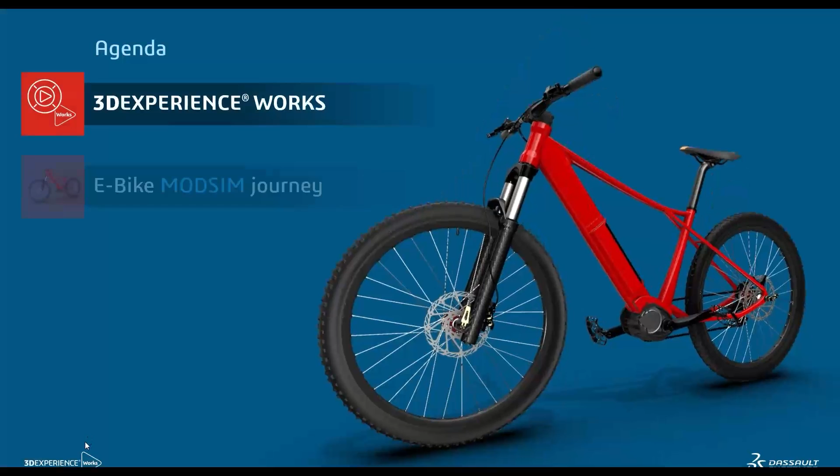So in today's presentation, we're going to start off by introducing to you what is 3D Experience Works portfolio, and then we'll dive straight into the MODSIM journey that involved design of this e-bike and improvement and enhancements associated with the same, and we'll wrap up with a few key takeaways.

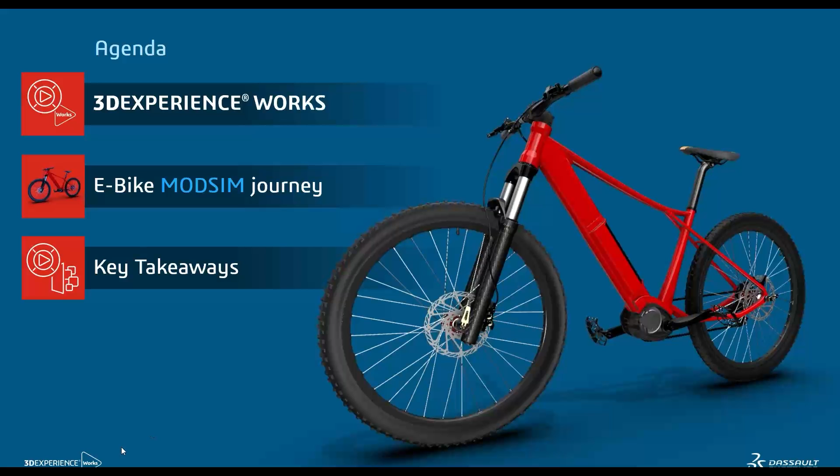3D Experience Works brings the power and breadth of 3D Experience platform to SolidWorks users. You are already quite entrenched with the awesome capabilities of SolidWorks in your design process. However, the 3D Experience platform integrates all brands and all products of Dassault Systèmes and brings their value with a native and fully integrated solution from design to simulation to manufacturing and governance and marketing and sales. However, in today's session, we're going to focus on synergy of SolidWorks and the Simulia-based applications on the 3D Experience platform.

Some of the key values that 3D Experience Works bring to the table is it leverages the fully integrated atmosphere of 3D Experience platform, where a SolidWorks CAD user can continue using the SolidWorks desktop, but take advantage of integrated simulation solutions on the 3D Experience platform. Yes, we understand that SolidWorks also offers a desktop simulation solution. However, the Simulia-based simulation roles on the 3D Experience platform bring some of the advanced capabilities, providing you a step up from SolidWorks desktop.

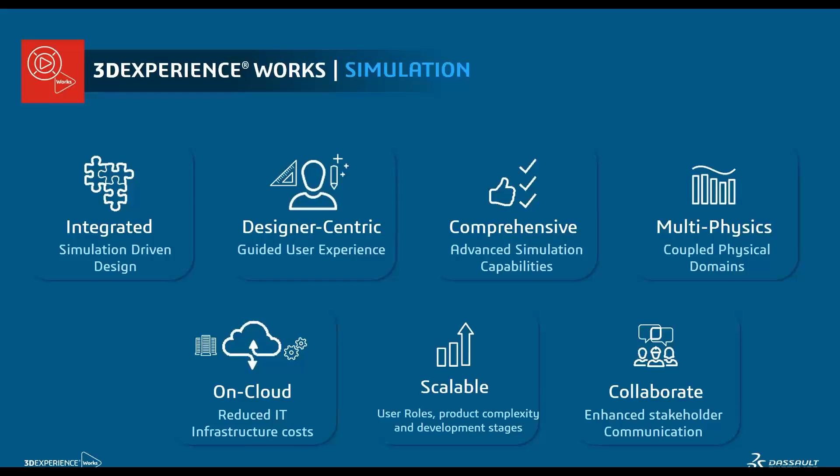Last but certainly not least, the most important value offered by simulation capabilities within the 3D Experience Works portfolio is the collaboration values, which allows the users to quite seamlessly collaborate across the product development chain and also across the supply chain. And hence, 3D Experience Works offers simulation-driven design in a collaborative cloud environment. What does this mean in a real product development atmosphere? That's why we have the e-bike example. And let me take you through this exciting MODSIM journey.

So in this case, we decided to build an electric bike as an example. Obviously, this is a fictitious case. However, we put ourselves in the shoes of our customers and went through the journey of designing a product. So some of the key drivers for us in terms of developing an e-bike were the growing popularity of electric bikes catering to a sharper rise in the demand for urban mobility, or more specifically green urban mobility, and a lot of tech-savvy consumers who are open to trying new technologies.

So to address this market need, we introduce to you the City Shark. This is the electric bike that consists of a battery pack, an electric motor, and a vehicle frame that is purpose built for commute with an electric powered motor.

Now let's switch gears and talk about the MODSIM approach. MODSIM, in very simple terms, leverages the synergy of modeling, in your case SolidWorks, and simulation, which in our case leverages the platform values. And it can be broadly classified into 5 categories.

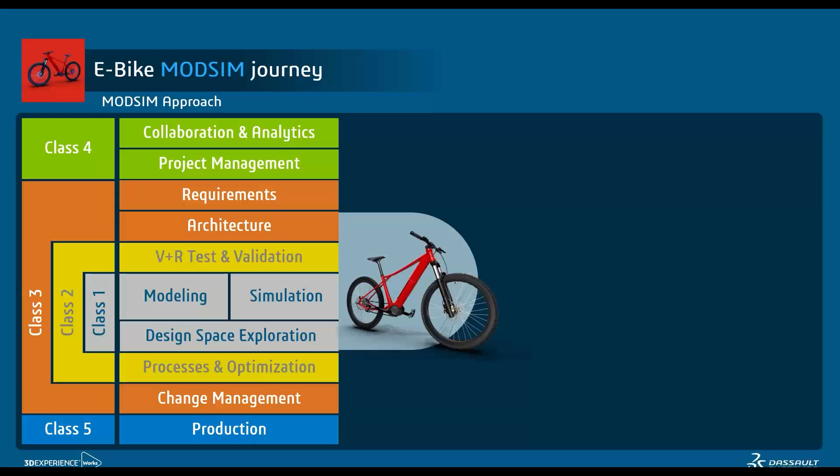The MODSIM journey starts from capturing requirements. So in this case, the key requirements include a lighter frame from a structural standpoint, a lighter motor pack from the electric motor supplier, extended battery range, which is a request from the battery supplier, and compliance readiness. These requirements can actually be captured on the 3D Experience platform and tied to the product tree so that you can trace specific dimensions and features of all these products all the way up to the requirements. You can ensure that the simulation results are allowing you to meet these requirements, and most importantly, change management of the same.

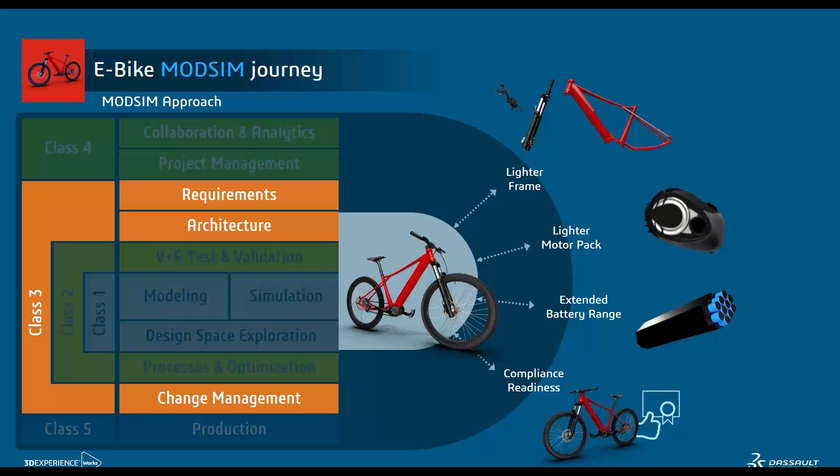Another class of MODSIM that we're going to talk about today is collaboration. In this case, we had multiple people across the globe, a manufacturer followed by a couple of suppliers, working from different parts of the globe. And in fact, this project was done during COVID, so there was no physical interaction between any of the stakeholders during this project. Leveraging the collaboration capability and also project planning and project management capability is quite key to class 4 of MODSIM.

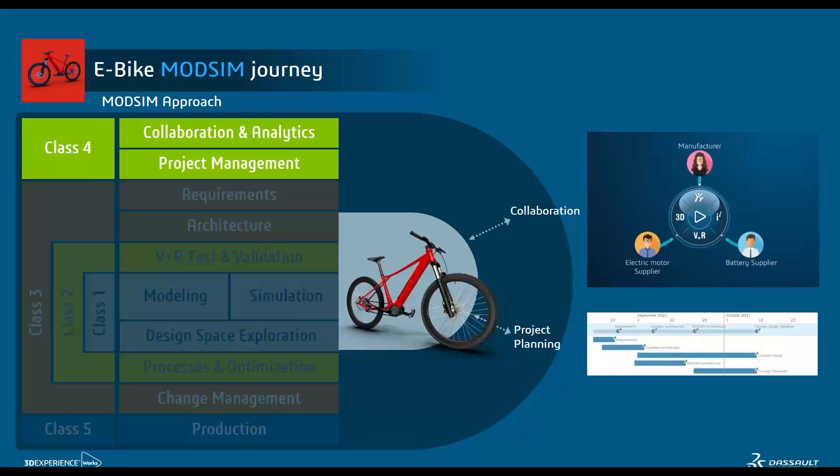Class 1 is the heart of MODSIM, and you may have already seen some of this with the SolidWorks CAD and simulation desktop portfolio. Here we leverage tight integration between SolidWorks for CAD or modeling and 3D Experience for simulation roles. Together we do a lot of design exploration to ensure that each subsystem meets the target requirements, from crash compliance to strength and durability to motor performance, battery thermal management, manufacturability from an injection molded plastic standpoint, and readiness for electromagnetics compliance.

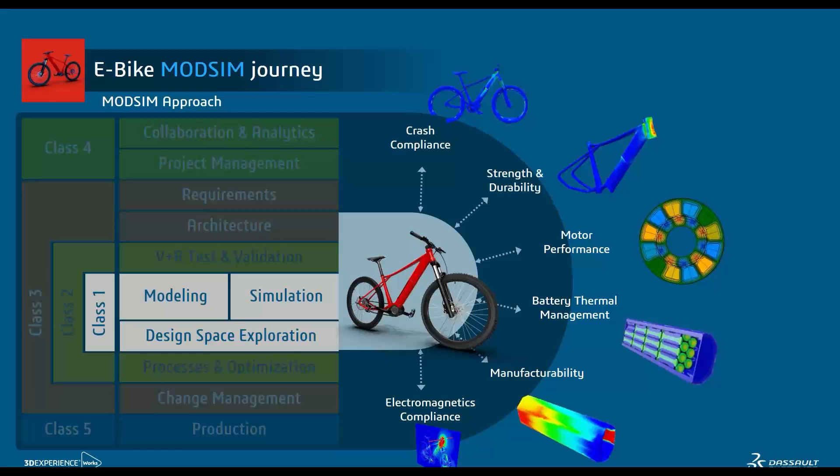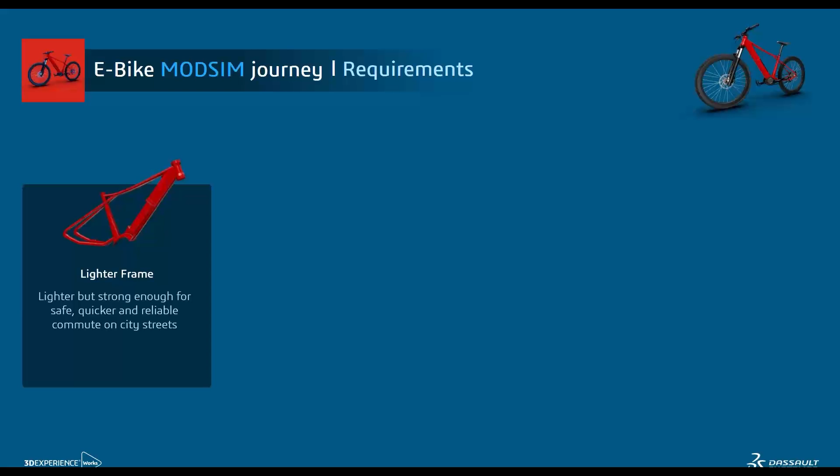So we've talked about what the MODSIM approach is, and now let's see the MODSIM journey in action. We're going to start all the way from requirements. In case of the e-bike, the key requirement from a structural standpoint is to have a lighter but stronger frame that is safe, quick, and extremely reliable for commuting on city streets.

From a battery standpoint, this is, we could almost say, the fuel or the energy house of the bike. The goal here is to deliver maximum power for the targeted range while ensuring safety from a thermal standpoint, both the safety of the battery and the safety of the rider during the urban commute.

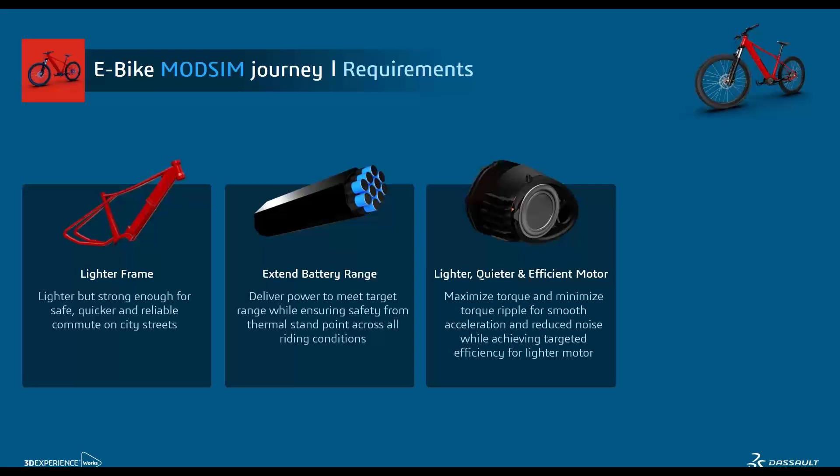The requirement from the electric motor supplier is to have a lighter, quieter, and more efficient motor. What does that mean? That means we need to maximize the torque while minimizing the torque ripple effects that have a direct impact on smoothness or harshness of acceleration, and reduce noise while achieving the targeted efficiency. And then compliance. In this case, leveraging simulation, we will try to gain confidence in whether the product in its integrated format is ready for compliance.

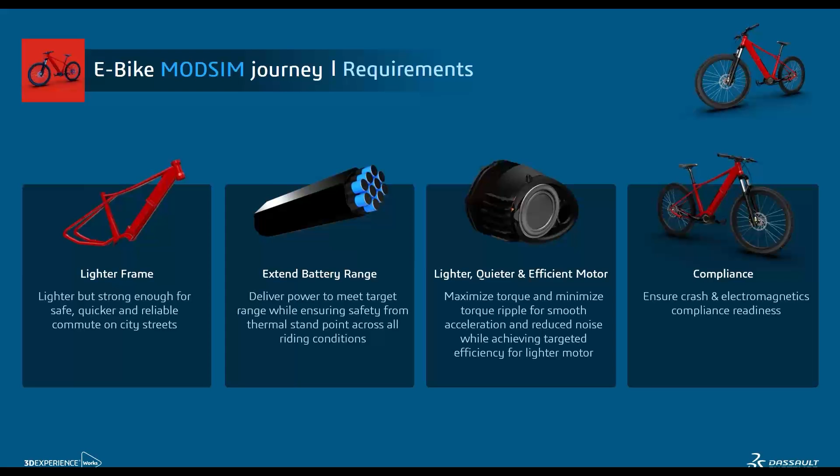So from a requirements standpoint, 3D Experience Works allows you to efficiently capture the requirements and manage them throughout the product innovation cycle. And all these requirements will actually be tied to the product tree.

Next is collaboration. We have the design work that's done on SolidWorks and the simulation work that's done on the 3D Experience platform, and they're very tightly integrated with each other, breaking the silos in a multidisciplinary environment. So here, we're not exporting or importing files. We are staying in the same model data while we're adding more and more simulation information throughout. While SolidWorks brings very powerful on-premise desktop capability, 3D Experience complements it with a cloud-based solution that makes your life easier for running expensive simulation types.

So in very simple terms, the integration between SolidWorks and simulation on the 3D Experience platform allows quite streamlined product development process, efficient MODSIM workflow, and powerful what-if scenarios. So let's look at it from the lens or from the eyes of a mechanical designer. The goal here is to explore design alternatives in order to meet engineering requirements.

So during the next few minutes, we will talk about how durability or life of the frame and the strength of the frame was ensured, how the injection molding simulations were performed to choose the design of the battery casing, how thermal simulations were performed to ensure the thermal safety of the rider as well as the battery, and last but not the least, electromagnetic simulation of the motor to ensure higher efficiency and lower torque ripple.

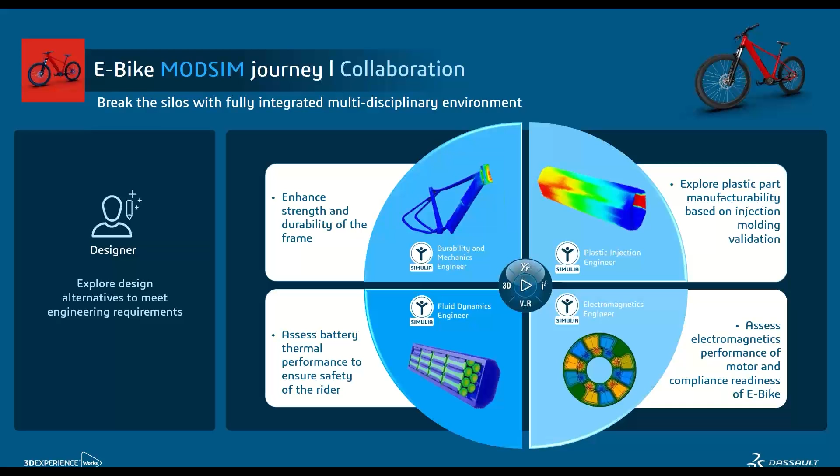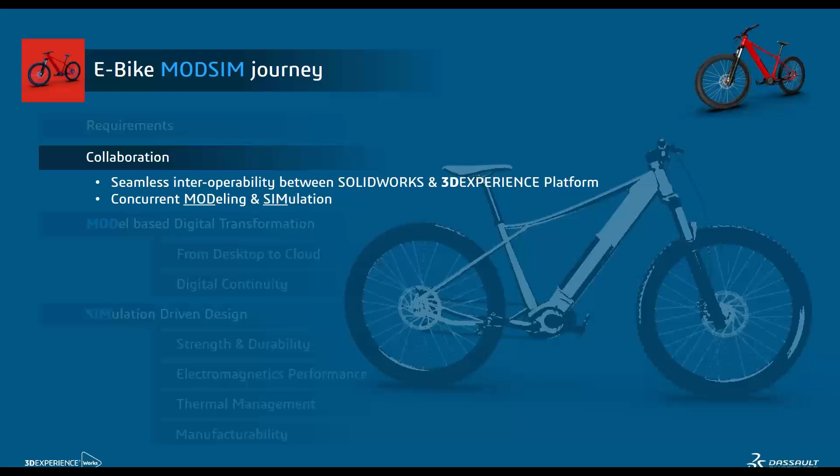So from a collaboration standpoint, 3D Experience Works with the MODSIM journey offers seamless interoperability and concurrent modeling and simulation. So let's go ahead and dive straight into it. We start our journey from the desktop and then go up to cloud. With 3D Experience platform, you can directly launch your SolidWorks environment with Design with SolidWorks app.

So here is the UI that walks you through the installation process of the SolidWorks, which you're already familiar with. Once SolidWorks is installed on the platform, you can request access to the collaborative designer role for the SolidWorks. And once you have access to this role, you're pretty much set with launching your 3D Experience UI directly from the cloud. And you see the compass that connects the powerful 3D Experience platform capability to your SolidWorks desktop.

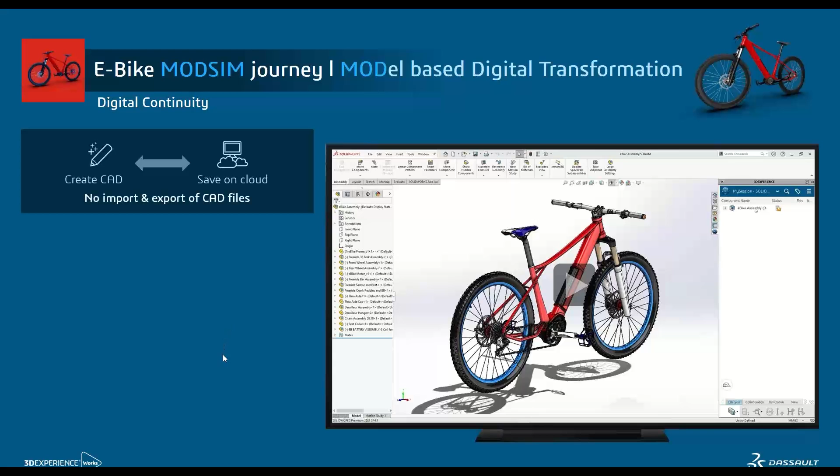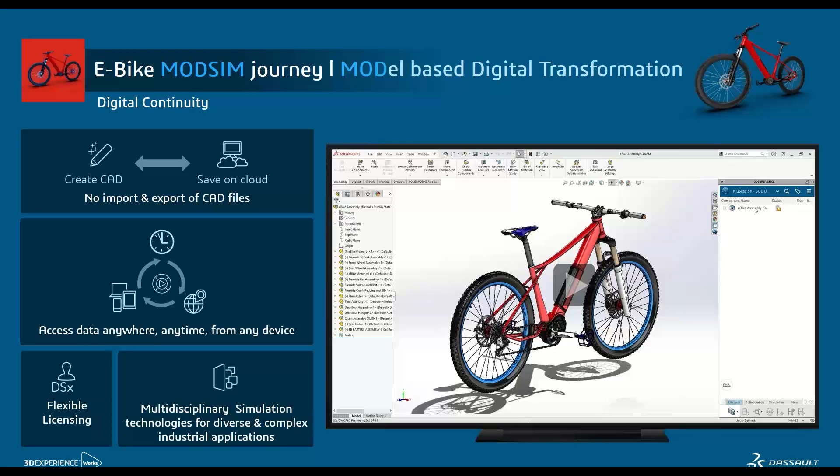So here we are going to ensure this digital continuity because the CAD is created only once, and that's within your SolidWorks environment. And then you save it on the platform with no need to import or export CAD files. And then you can come back to SolidWorks as many times, make as many design changes, and update your simulation model. Most importantly, we are going to leverage the multidisciplinary environment of 3D Experience platform from a simulation standpoint to assess the product performance.

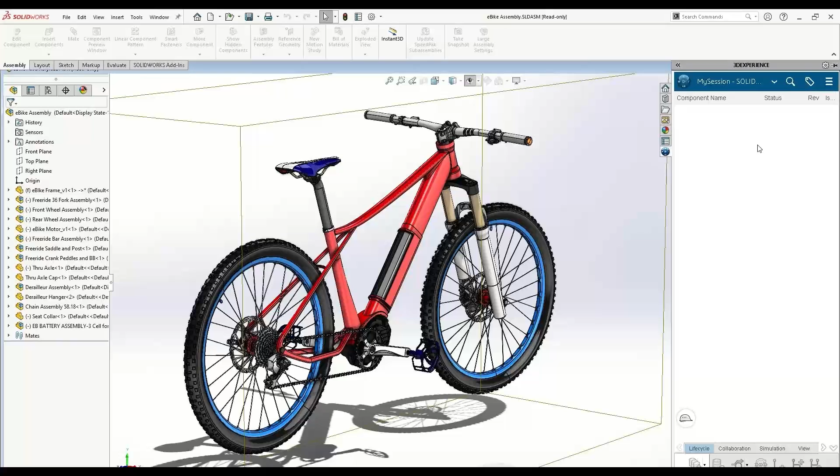So in here, we're going to launch our SolidWorks UI and load up the current version of the e-bike model. And now we want to make various changes from the structure of the frame to the battery casing design to the electric motor. As you can see on the right hand side, I have the compass, and that allows me to save this model originally created in SolidWorks on the platform and launch the structural simulation capability that's powered by Simulia Abaqus technology directly from the SolidWorks UI.

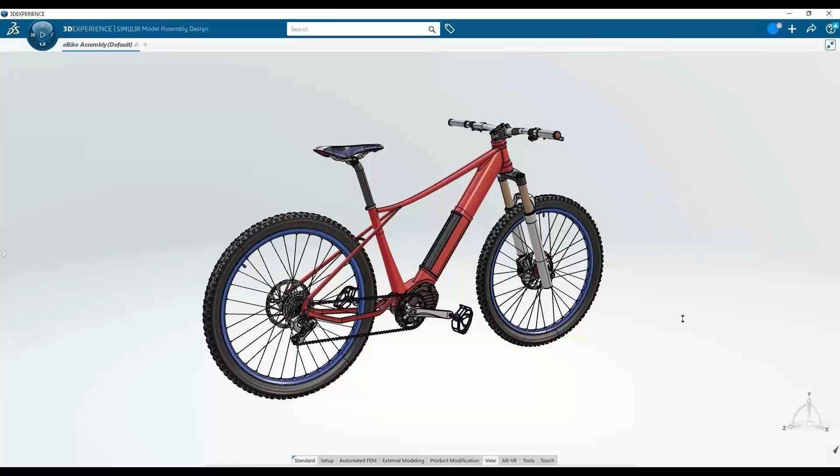So now we are in the 3D Experience platform user experience, and we're going to go through the structural simulation of this e-bike. With that said, what you saw is clear digital continuity that allows you easy and instant access to latest version of the software because it's cloud-based, so you get very quick updates. And the cloud installation is quite seamless. You can get started within an hour from the minute you have the license up and running.

So now we've built the foundations. We've captured the requirements. We have established the collaboration between the OEM and the suppliers and the key stakeholders. We've installed 3D Experience platform and connected the same to SolidWorks. We've even loaded our SolidWorks model on the 3D Experience platform. Now we're going to go through the simulation journey in terms of strength and durability, electromagnetics performance, thermal management, and manufacturability.

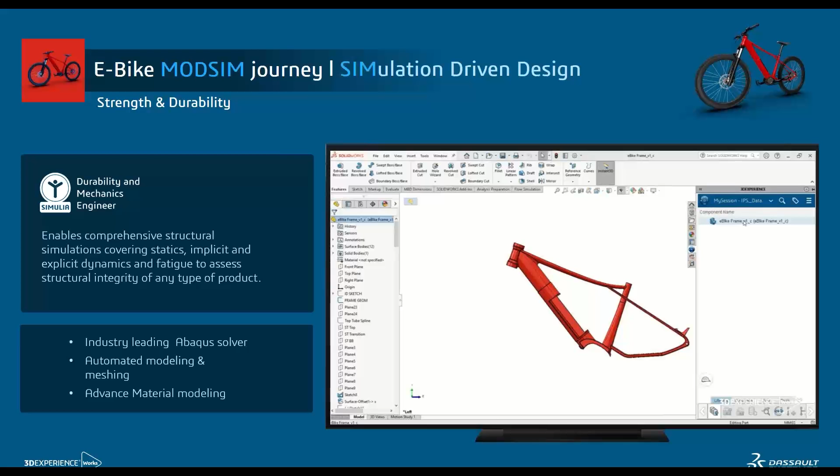For strength and durability, you can take advantage of durability and mechanics engineer role that brings industry-leading Abaqus solver for performing comprehensive structural simulations covering statics, implicit and explicit dynamics, fatigue analysis to assess the overall structural integrity of the product. It also comes with automated modeling and meshing capability that significantly reduces the turnaround time for product development and simulation. It also comes with advanced material modeling capabilities, which add a huge value when you're early in your product design exploration phase.

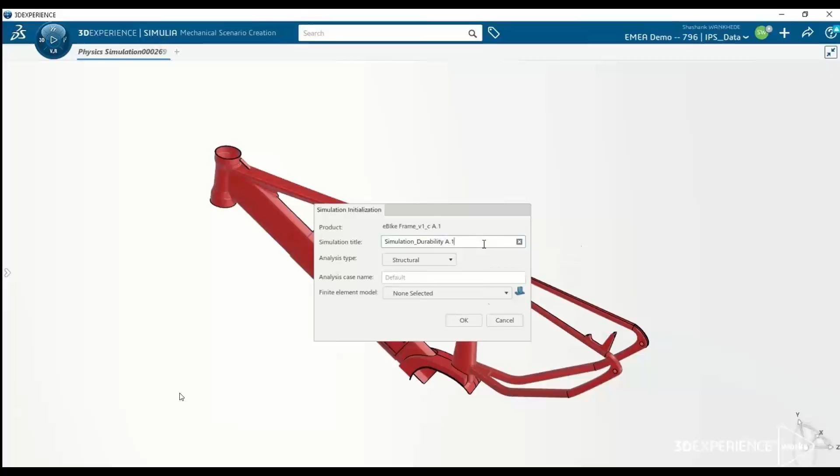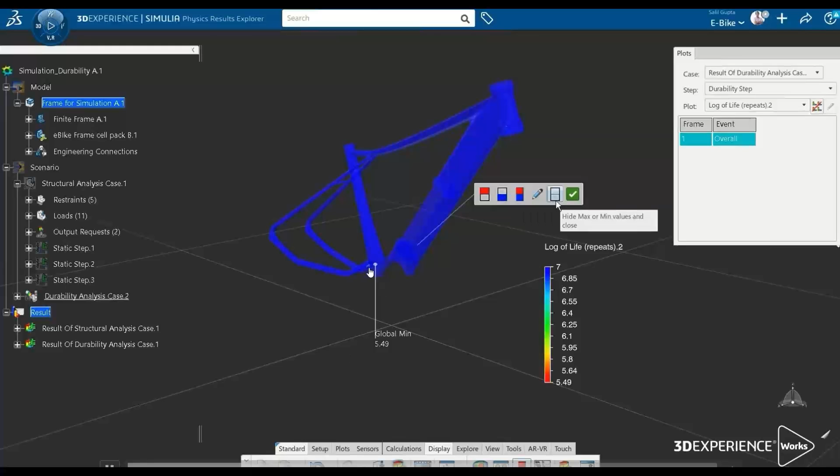With that said, we first start with the assessment of structural integrity of the frame in terms of, is the material light enough? Is the structure strong enough to sustain various load cases? So this simulation involves a linear static stress analysis followed by a durability analysis. The von Mises stresses indicate higher stresses near the neck of the frame, whereas the durability analysis indicates lower log of life or lower lifespan near the joint that's quite closer to where the electric motor is mounted, where the back elements come and connect with the central part of the frame.

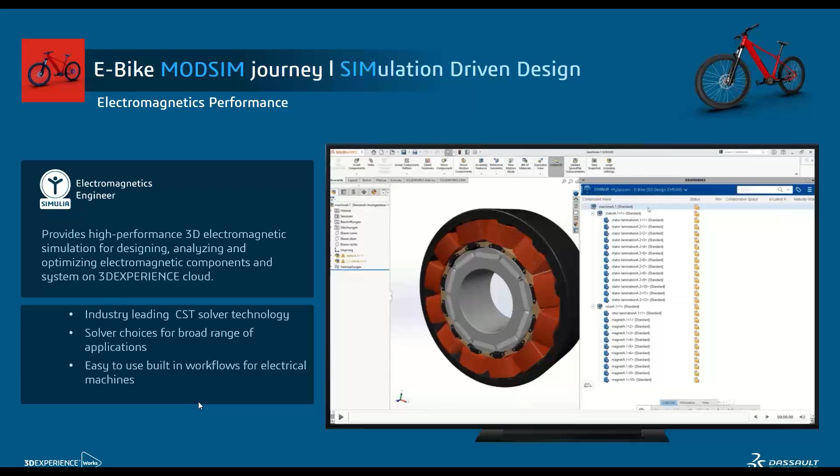Based on this information, we could redesign in SolidWorks, come back to the platform, and update the simulation data. What about electromagnetics performance? The electromagnetics engineer role offers industry-leading CST solver technology in the context of the 3D Experience platform, and offers broad solver choices for applications ranging from antennas to motors to PCBs in terms of assessing and optimizing the electromagnetic performance.

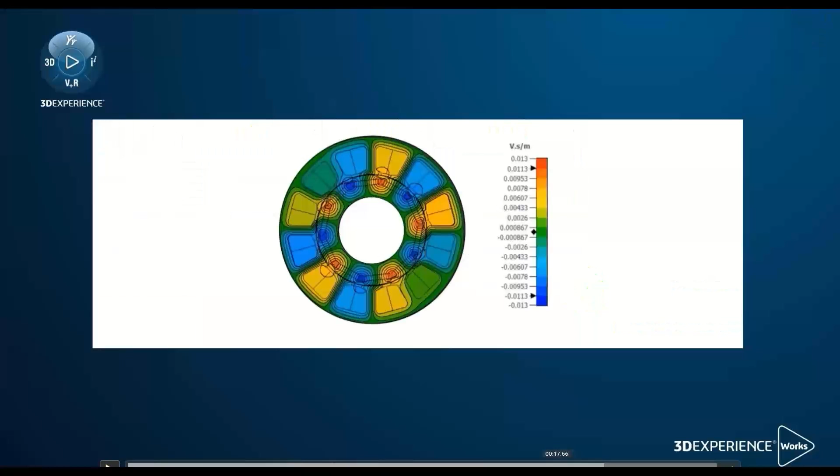Here is the permanent magnet electric motor that's used in the design, and our supplier is also using SolidWorks CAD, but is exploring various designs and ranking them based on maximum torque value. So several CST simulations were performed in order to ensure that there is highest torque, reasonable efficiency, and acceptable level of torque ripple. Torque ripple is a key performance indicator that ensures smoothness in acceleration for any electric motor.

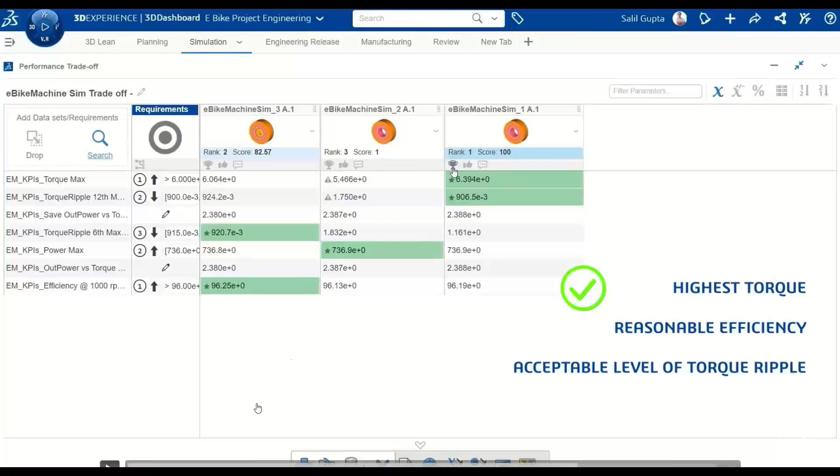So leveraging performance trade-off study, you can assess the electromagnetic performance between various designs of the electric motors within the 3D Experience platform. You can also ensure that the results are yielding higher yet smooth ramp up of acceleration while minimizing the noise experienced by the rider.

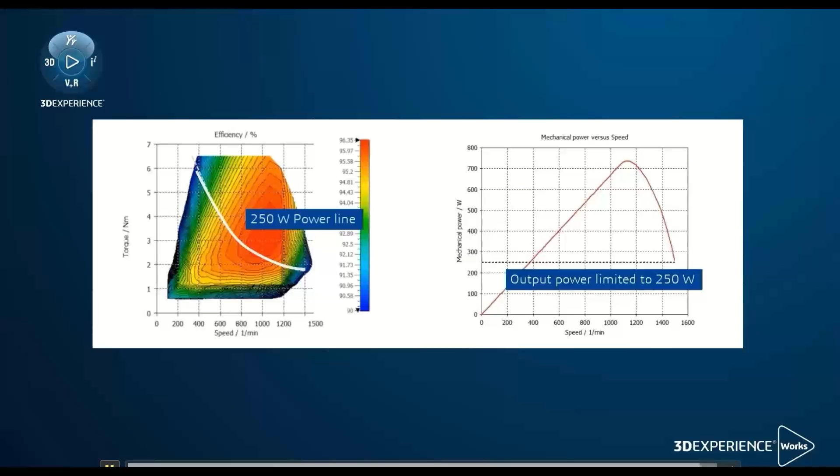Then we switch gears and talk about thermal management. In case of battery thermal management, we leverage the fluid dynamics engineer role, which enables designers and engineers to perform fluid flow and thermal simulations in order to explore and improve the product designs. The fluid dynamics engineer role brings a very guided user interface that is quite tailored for non-simulation experts and experts alike. It offers automated meshing with boundary layer modeling technology, comes with industry standard turbulence models and advanced wall modeling options. It has quite comprehensive fluid flow and thermal physics capability.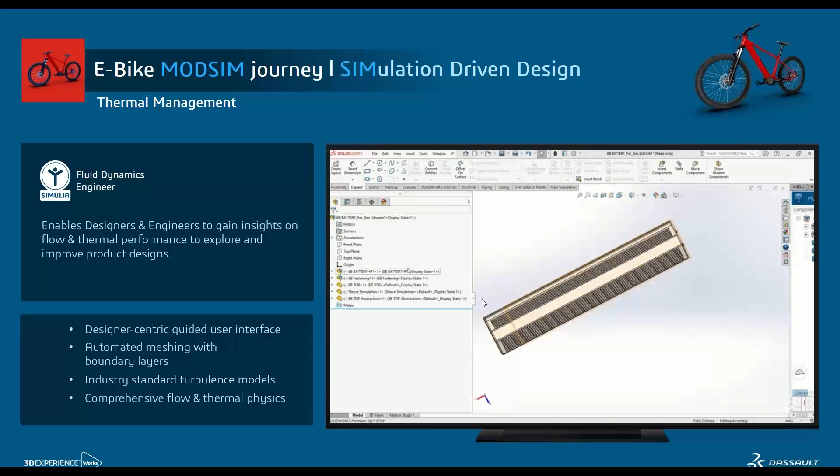So in this case, we are primarily interested in exploring whether a casing needs to be plain or whether adding long slots would help in meeting the thermal requirements. So again, we start with the SolidWorks environment. We save this model on the 3D Experience platform. In order to extend the range, we've gone up from 3 battery modules to 4 modules. What you're seeing on the right-hand side is the guided user interface offered by the Fluid Dynamics Engineer role that literally walks users through every step of the simulation setup process, providing real-time feedback and guiding them on the next steps.

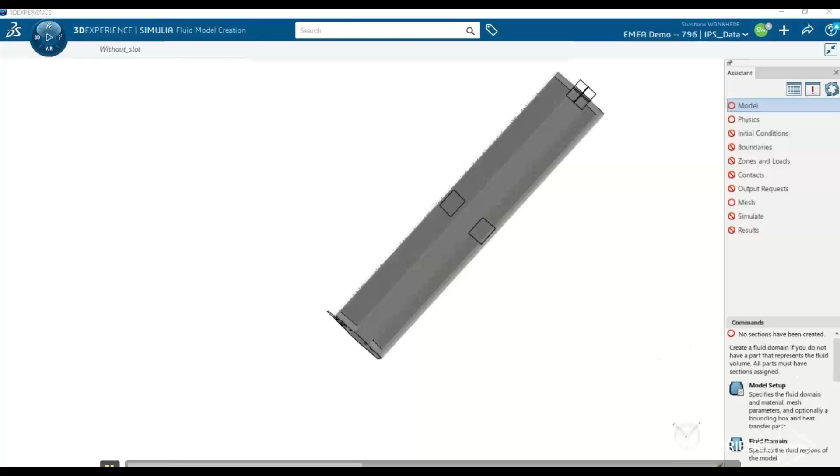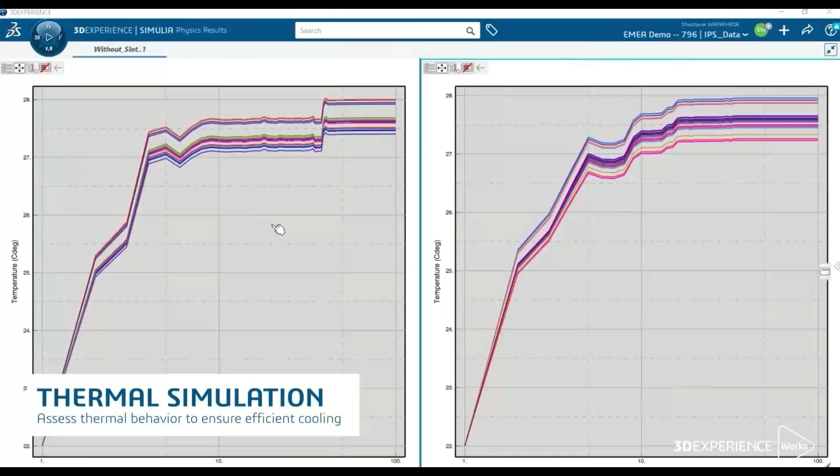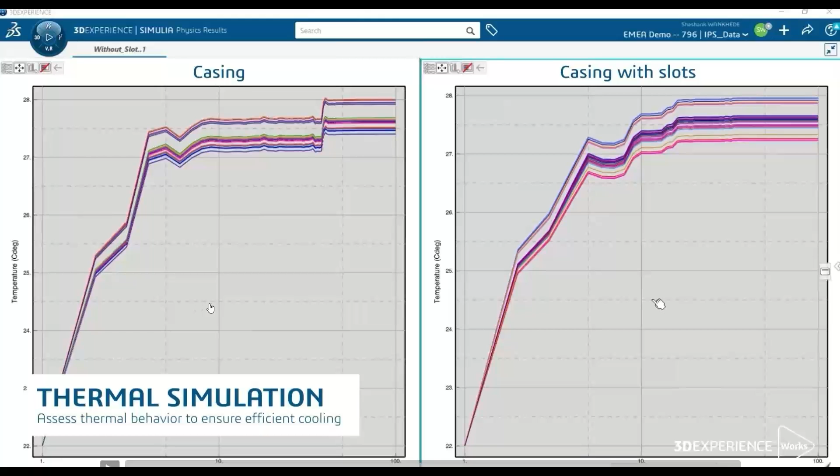So here, we are first applying materials and defining the fluid region, which is inside the battery pack. And you can see a stack of 4 modules. What we are looking at is the surface temperatures of all the cells within the battery pack, as well as the surface temperature of the casing. The goal here is to ensure that all these temperatures are below 35 degrees C. And it looks like, in this case, both the casing and casing with slots have very similar thermal profiles. Yes, the casing with slots has relatively lower temperature for some of the cell surfaces, but they both meet the key criteria. So based on this, we now would pass the buck to the plastic designers.

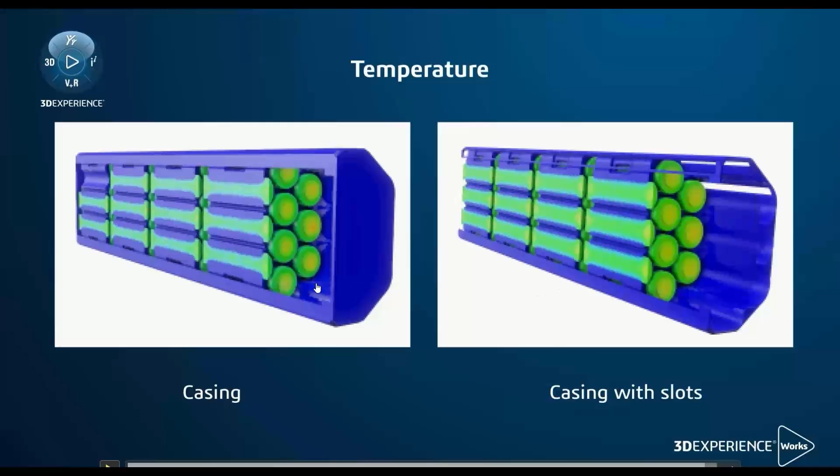We also look at very intuitive 3D results to ensure that not only the history or the numerical data makes sense, but also the field information or the contour plots are telling the same story. So as you can see in the cross section of the battery pack between the 2 models, both of them look very similar in terms of their temperature profile. So since both of them meet the criteria, we now leave the design decision to the plastic part designer, who's going to design and analyze the injection molding simulation with and without the slots.

That's using the plastic injection engineer role that allows users to validate and optimize injection molded part designs quite early in the product development process. This has a very nice designer-centric guided user interface, similar to the fluid dynamics engineer role. And it's the same technology that exists in SolidWorks Plastics, except this is on the 3D Experience platform. It leverages quite an extensive plastic material library. As of today, we have more than 4,500 materials from various plastic manufacturers across the globe.

Plastic part designers or mold designers or even mechanical designers who design plastic parts can ensure manufacturability, or answer questions such as, is this part ideal for injection molding? Are there going to be weld lines? Are there going to be air traps? Are there going to be knit lines? These types of questions can be answered by performing filling simulation, packing simulation, cooling and ejection simulation. And the best part is leveraging the multi-physics attribute of the 3D Experience platform. You can even perform warpage analysis leveraging the Abaqus solver that exists on the platform under the hood of a structural role.

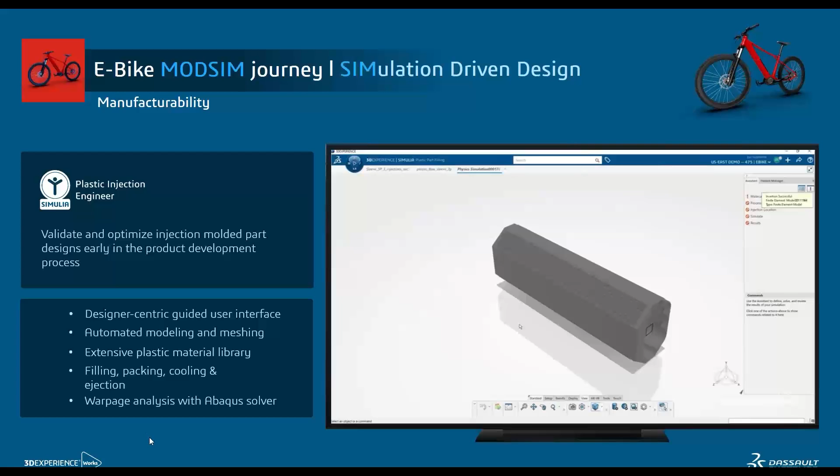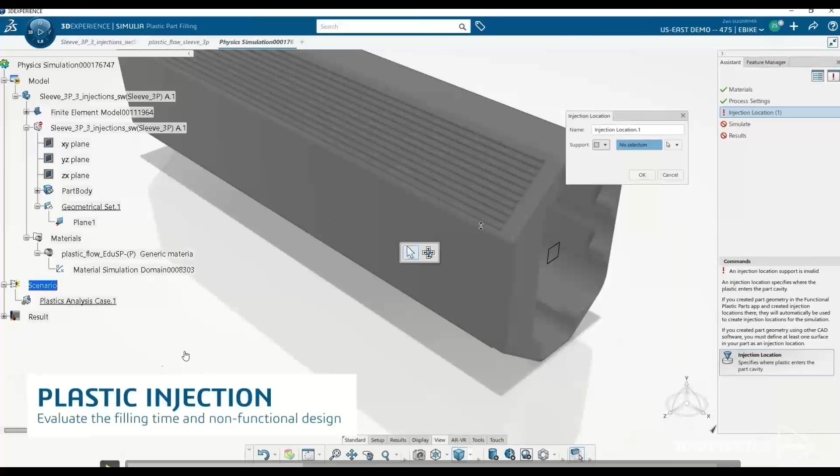So in here, as you can see, we have a really nice material library that users can access through a material palette. You apply the material library, define the injection location. There's option for users to either manually specify the location where molten plastic is injected from the mold into the cavity, or there's option for automatic computation of these injection locations to get you started. So in this case, we placed 3 injection locations based on experience.

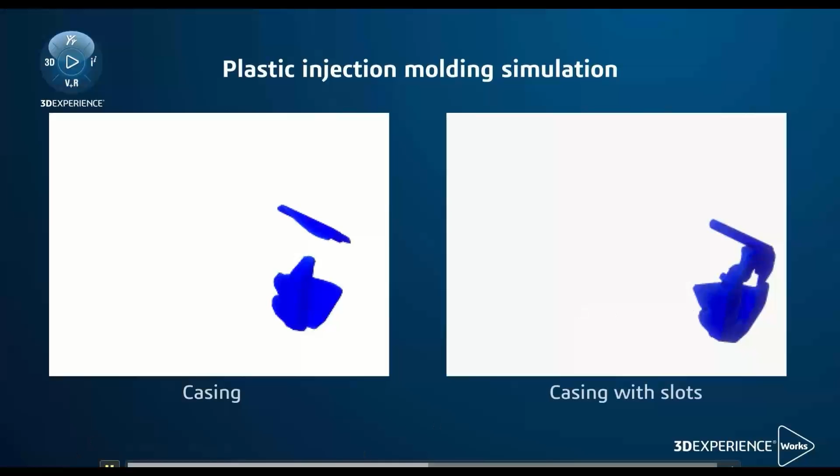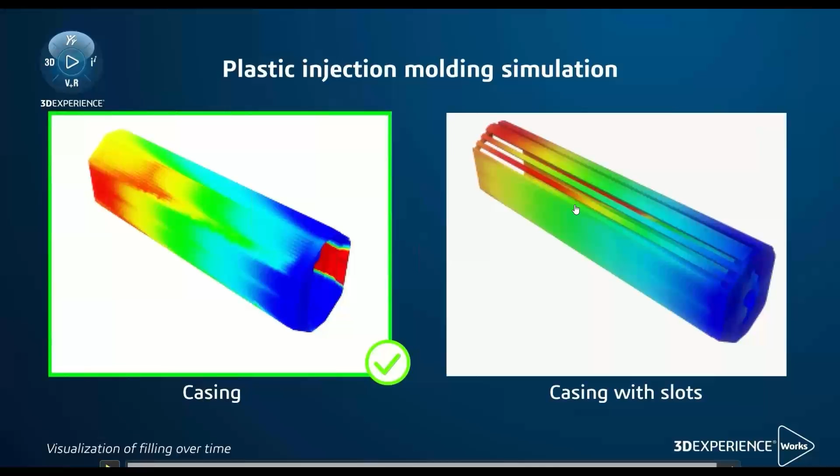And what you are going to see on the left-hand side is the filling simulation inside the cavity with the casing that is plain. And on the right-hand side, you're going to see the same simulation for casing with slots. There are 2 factors to be considered, which is how fast is the filling and how complete is the filling. So in this case, what we noticed is that the casing that is plain is actually much cheaper to manufacture, and it does meet the criteria as opposed to casing with slots, which takes a relatively longer time to fill because of the slots.

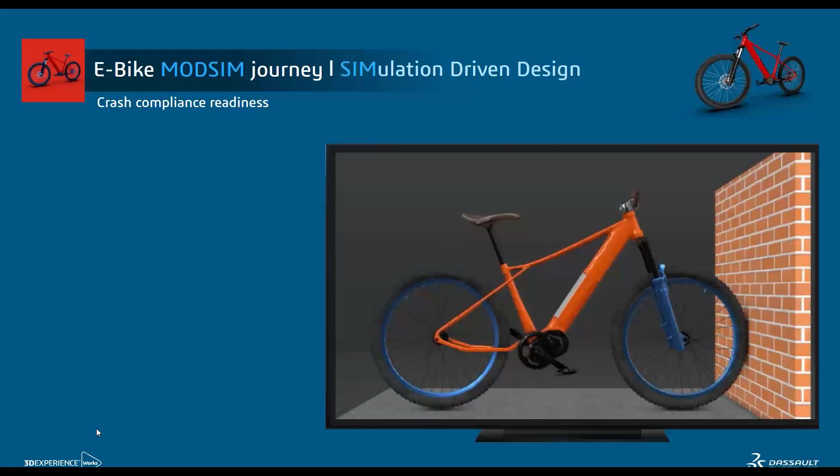Now that the battery supplier and the motor supplier have finalized their designs, they pass it back to the OEM. And now comes the part of compliance. In terms of compliance, simulation can help you gain some early insights on whether this product as a whole in its integrated view is ready for compliance. This is not a compliance simulation, but this is a simulation to check or to ensure or to get an idea of whether the product is ready to pass the compliance.

Using the structural mechanics engineer role, we are going to perform a crash analysis on various use cases or load cases, which could be the bike crashing into a wall. And it's actually quite important in terms of the impact this is going to have on the structure and the motor and the battery. The last thing you want is for the battery pack to blow up as a result of a massive impact to a structure. Right? So here we're going to take advantage of the Abaqus solver technology within the structural mechanics engineer role.

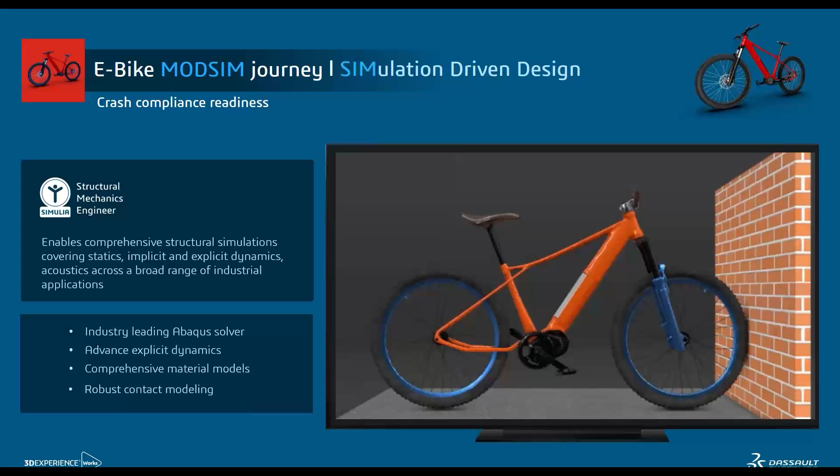And Abaqus, I don't know if many of you have heard, Abaqus is actually the leading industry solver when it comes to explicit dynamic scenarios. This could involve drop tests, impact tests, really massive crash simulations. So these are kind of the areas where Abaqus has been known for in the industry, especially in the automotive industry for decades. And another set of key capabilities this role offers includes comprehensive material modeling and robust contact modeling capabilities.

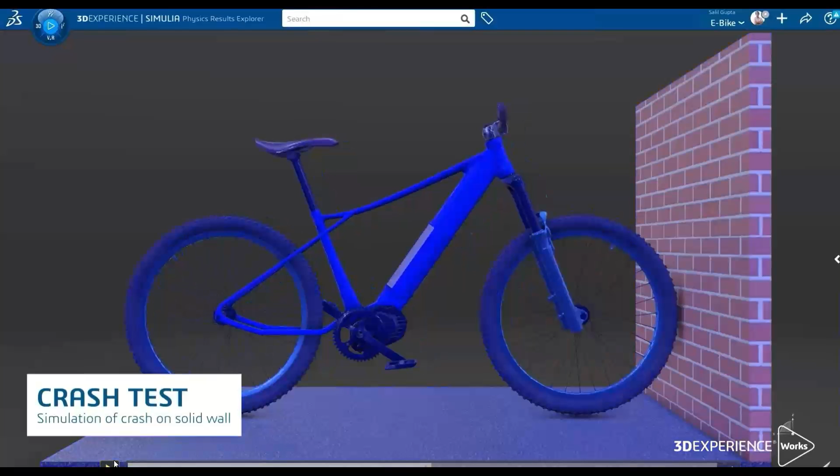So here, what you see is the bike with all the components integrated. And what we are going to see is the effect of the impact or the crash on the structure, on the rim, and so on. So with intuitive post-processing, you can get a sense of how each component is behaving during the crash. You can see the tire coming off of the rim, off of the wheel during this simulation as well. So this gives a sense whether the design itself is ready to go through a compliance. A simple reason being the physical compliance tests are quite expensive in nature, and you want to reduce the iterations, both in terms of time and cost.

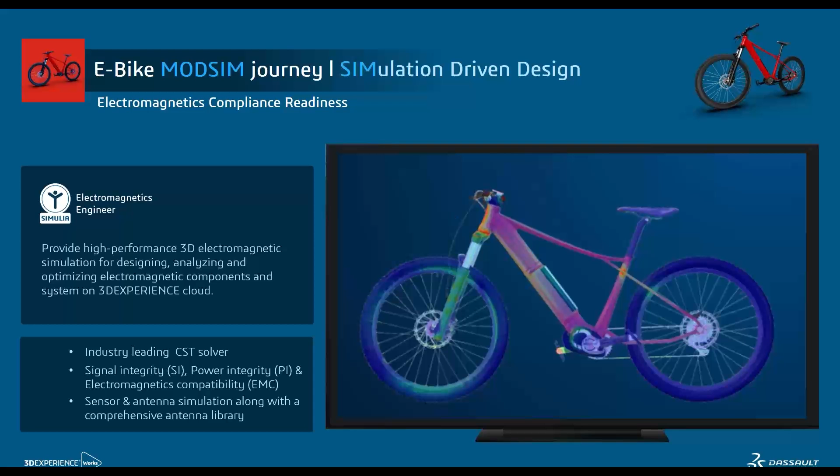Next is the electromagnetic compliance readiness. Again, using the electromagnetics engineer role, which also brings in very powerful capabilities to assess signal integrity, power integrity, and electromagnetic compatibility. So here, the antenna of this e-bike is placed on the handle. This is a GPS antenna we are talking about, which helps to locate the bicycle itself. And in order to pass the compliance, and this is quite mandatory for anyone using electronic components, you need to ensure that the electromagnetic emissions are within the limits.

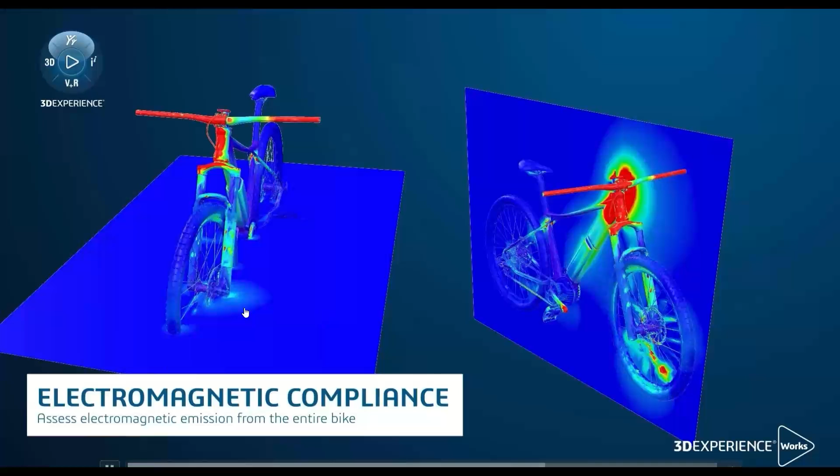So we ran simulations in a fully integrated environment and assessed and made sure that the electromagnetic emissions are not going to affect the rider, and it passed the required guidelines in terms of the electromagnetic field around. So you can see the red area indicating higher electromagnetic activity or emissions near the handle, where the antenna is placed, but not so much in the rest of the system.

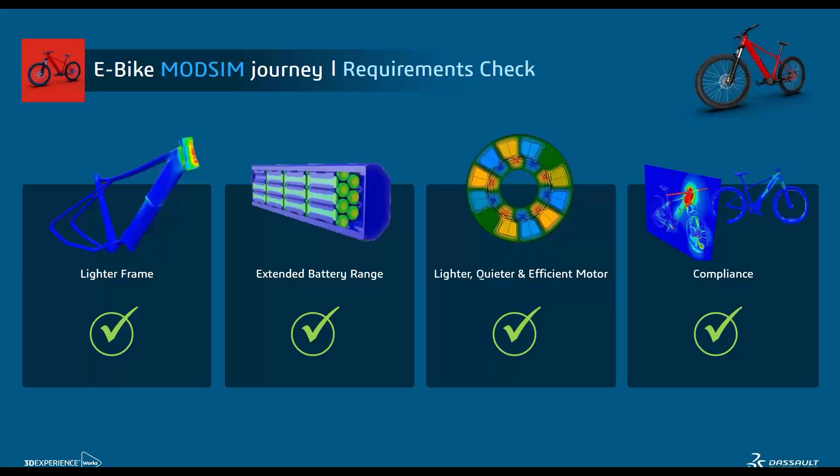So now we look back at the requirements. So we have a lighter frame, an extended battery, a lighter, quieter, and efficient motor, and a compliance-ready design that gives a lot more confidence in going through the compliance process. With the e-bike MODSIM journey, as you could see, we're able to deliver end-to-end modeling, simulation, and design exploration with a strong integration between SolidWorks and 3D Experience platform.

So let's talk about some of the key takeaways of the MODSIM approach. From an engineering standpoint, MODSIM approach with 3D Experience Works portfolio offers digital continuity from requirements to product delivery, simulation-driven design exploration where you're making design changes in SolidWorks and then you're updating the simulation model automatically on the 3D Experience platform. Very tight integration between multiple disciplines, as you could see. After the plastic simulation, we can also perform warpage analysis using the structural solver on the platform.

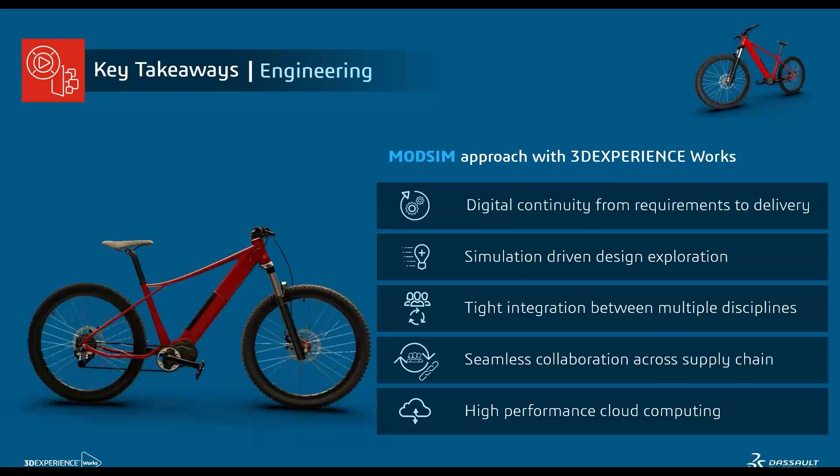Seamless collaboration across supply chain, in this case that involved the battery manufacturer, the motor manufacturer, and the OEM that's making the bikes. High performance cloud computing was used in all the simulations, so that allows to accelerate the turnaround time of the simulation-driven design process. What does this mean from a business standpoint? On the business side, first and foremost, it helps you get really first in the market. It's faster time to market, offer an innovative product portfolio within a shorter turnaround time. That helps you beat the competition.

And a great example here is, I don't know if you've paid attention to how the launch events of Apple have evolved over the last many years. When the second or third version of iPhone came in, they used to have one event every year and launch one iPhone. Now they have multiple events, and even if there's a single event per year, they launch multiple variants of iPhone, multiple variants of iPad, and watches and so on. However, being able to manage those variants and deliver them in the shorter turnaround time, that's very challenging with siloed tools for different aspects of product development.

That's not the case with the MODSIM approach, because everything is tightly integrated and you can have multiple variants within the targeted timeline. You can reduce prototyping, compliance, and warranty costs, which is a huge part of product development from a business standpoint. And obviously enhance operational efficiency, leveraging the collaborative aspects. And last but not the least, reduce IT hardware and software costs, which can get quite expensive as you start using simulation to drive the product development process.